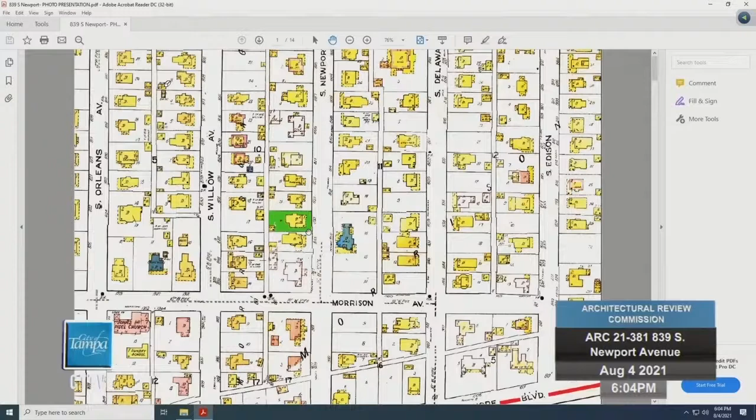Highlighted in the green shaded area is the property in question at 839 Newport. Newport is the front-facing street. There is an alley to the rear that runs north and south. As you continue to the west, you have Willow as a point of reference, and then Morrison to the south. You see the grand wraparound porch that was period appropriate to this house when it was constructed. The wraparound porch is a character-defining feature that's still there in its original state.

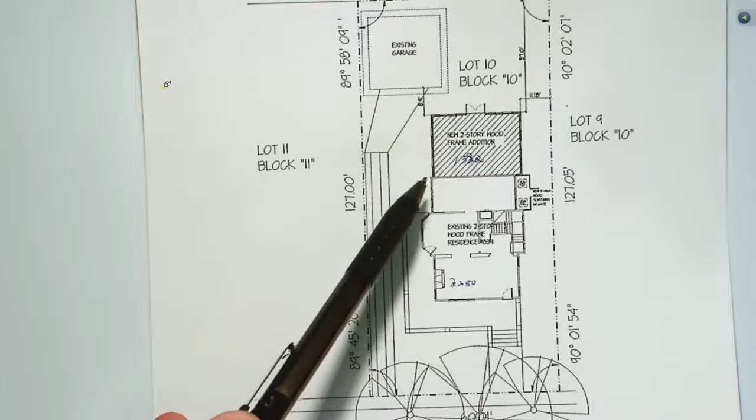And then on the south side, we have set back the home the 6 inches that are required by the ARC and the local code to make a clear demarcation from the existing home to the new structure. Also important to note that the roof lines and the soffits from the new house to the addition are consistent, and you will not see a break in any of the soffits or roof lines on the north or south ends. And then on the back, as requested, we've added these double doors with a porch and steps down to the rear yard.

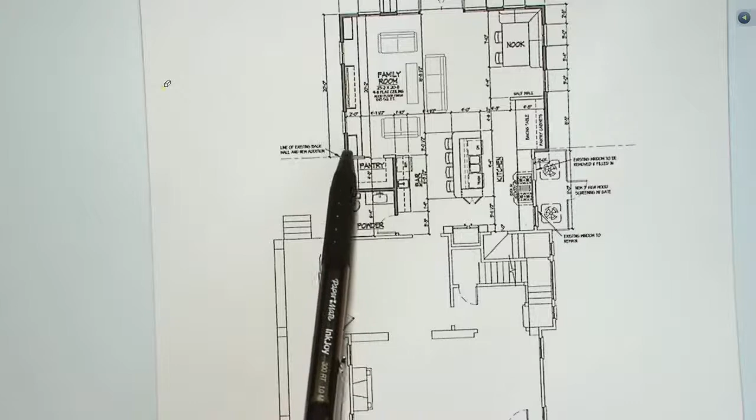This is a floor plan of the ground floor. You can see the notch here, the 6 inches that I noted in the previous site plan, and again the elevation and sight line of the existing home structure to the addition are concurrent here. What we're trying to do is, this home has a proper formal living room when you walk in, a nice dining room, but as it exists, there wasn't a large family room and kitchen to accommodate a family of 2, possibly 3 one day. We've added a generous family room with a nice eat-in kitchen and kitchen island that I think will really make this a spectacular home for our family.

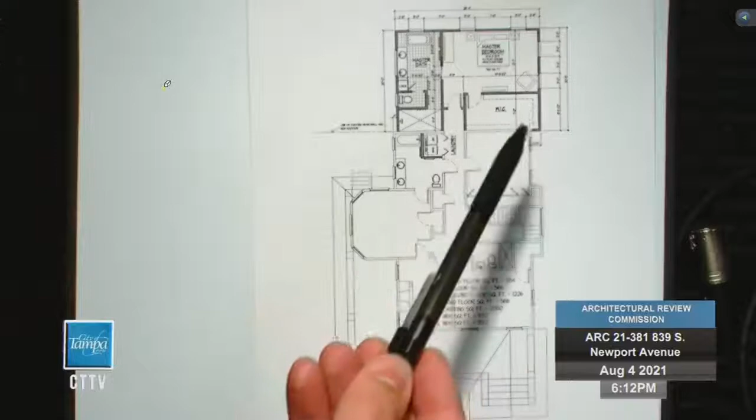This is a floor plan of the second floor. Again, existing home at the setback notch, 6 inches on the south side here. Keeping in the sight line of the north side, the same, concurrent, the elevation goes straight up from the ground floor to the second floor. What we've done here is we've expanded the second floor to include a master bathroom, a master bedroom, and a walk-in closet, in addition to a much-needed laundry room for the house.

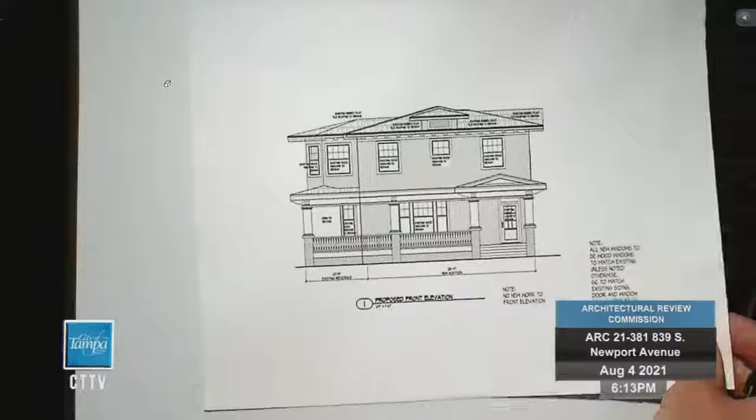This first elevation picture is the east elevation. This is the front of the house. There are no changes to the front of the house from the street level. What you see now is remaining. The only change, as I noted in the beginning of the presentation, is that we are stripping the brick of the paint from the previous owner to restore all of the brick to the original state it was in 100 years ago.

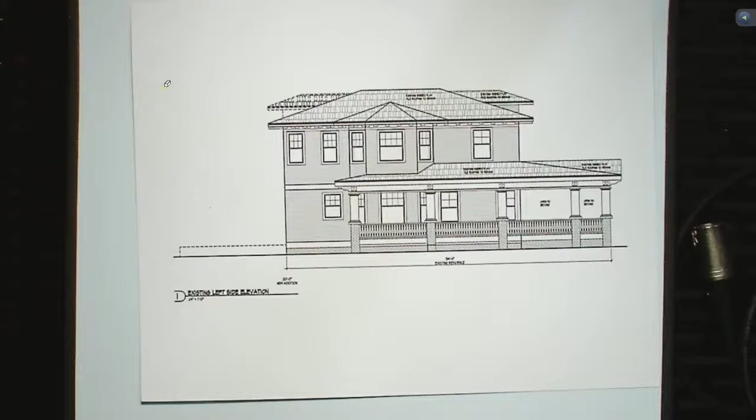This is the south elevation. Again, this is the existing home with no additions shown here. Let me get the second elevation.

This is the proposed addition from the south. What you see here, the existing home ends, this is the 6-inch notch that I showed you in the site plan, and then the same roof and soffit line coming across, no change there. In the initial elevation that you saw, this soffit at the rear of the home will need to be removed, and we're going to replace it back with the addition. So the roof structure itself, while it's expanding, the architecture of it will remain the same as it exists now.

And then we've added 4 windows on the south elevation. These 2 are in the family room, and these 2 windows on the second floor are for the bathroom, the master bath.

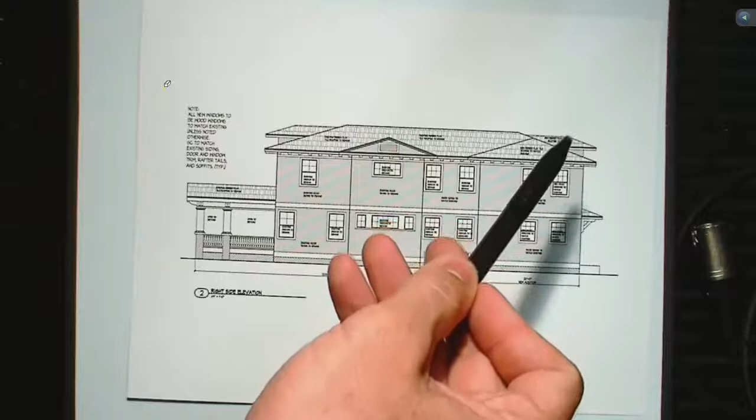This is an existing elevation of the house from the north. This is the proposed addition from the north. The demarcation from the old house to the new addition is where my pen is here. These two windows on the second floor are in the master bedroom, the two windows at the bottom are in the eat-in kitchen area. Again, same comments on the roof line, soffit line coming across remaining the same, and the addition of the soffit roof piece at the west elevation will remain the same.

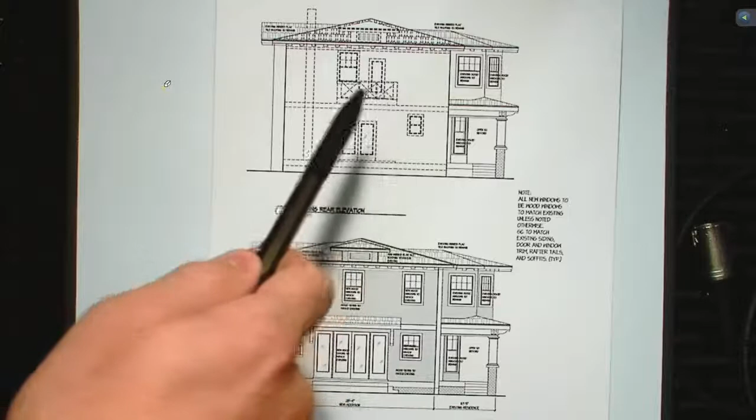The picture at the top of the page here is the existing home. There's a little Juliet balcony that will be removed and replaced with these three windows that you see here. We're adding 4 French doors, 2 operable at the ground floor level with windows flanking either side, a little roof eave over the 4 windows in the rear, and then a porch step coming off of the rear of the home to access the rear yard.

The final 2 photos I have for you are the bird's eye view of the roof lines. This is the home as it exists today, and this shows the addition of the roof lines, maintaining the sight lines and the soffits on the north and south elevations, and replacing the architectural roof detail on the west side when we replace the roof.

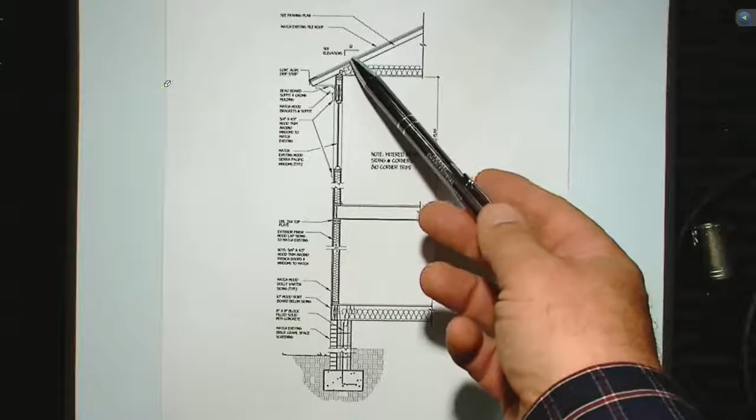I'm basically here just to go over some of the elements that are important on the wall sections. The wall section on the exterior is very important to this house for a couple reasons. The tile on this roof is a little bit different than we've seen before, I have a picture of it for you here. As I go through the wall section, what I wanted to point out to you was the roof is going to be matching exactly as you see it. I'm going to have a sample of the roof. We found a manufacturer that actually has this roof, which is pretty fortunate.

We have an extensive bracket system underneath this house on the soffits, over 2.5 feet, which I'll show you a picture of in a minute. It's very extensive, with beadboard.

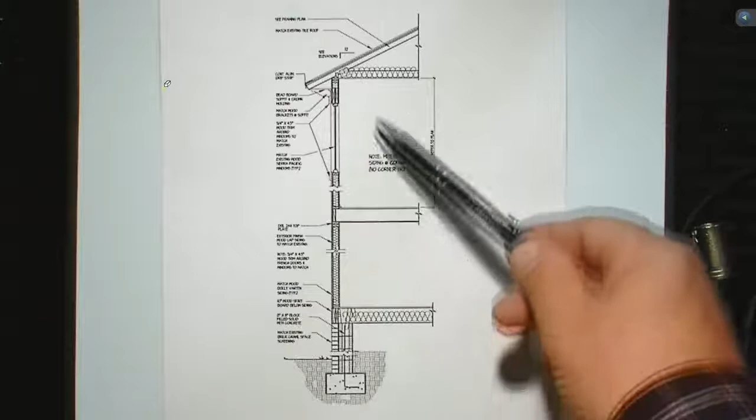The window moldings will have the same 5/4 by 4.5 inch wood casing around all of them, and the top of the window will have its bed molding or small crown. The siding will be Dolly Varden siding, mitered on the corners, with no trim on the corners of the house. We'll have a 10-inch board below the siding before the crawl space, and then brick on the crawl space that we're going to reproduce.

I'd like to show you a few pictures of this. I have a sample of the roof, but in actuality, that's what we're going to be duplicating. It's a flat tile roof with 2 concave areas that interlock, quite unusual. This is exactly what we can have reproduced and put on the new section of the house, as well as the new dormer on the roof line that we're taking off and putting back on for the attic, as well as the caps on all the ridges.

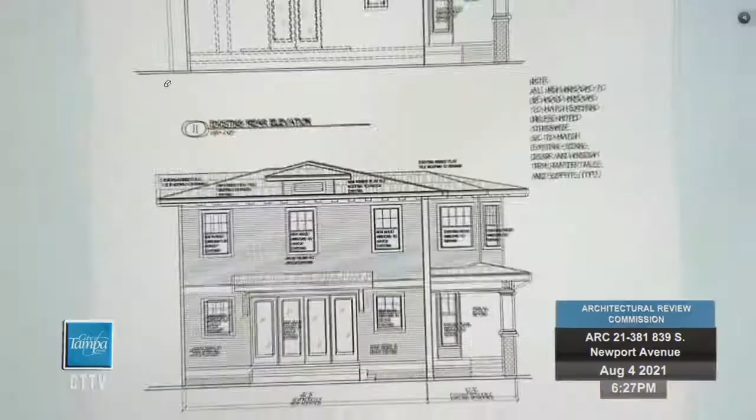Here's a picture, let's go back to that a minute. It'll have a bracket system similar to, I don't have a side cross section of that, but it'll be your typical side angled bracket system that you'd see in Hyde Park, with barrel tile roof and beadboard understructure. Is that actually barrel tile or flat tile, like the rest of the house? It is flat tile. Okay, and then the brackets are open, not closed? Correct, like the one on the side elevation. That's correct. And since you're saying beadboard, I assume that means it's a flat plane, correct?

It'll be tongue and groove. Okay, and then in terms of the steps coming out, what material? We are going to be using wood, 5/4 pressure treated material. Okay.

So, while we have you up here, I know you discussed in detail the nature of the window and door details in terms of their framing and how they sit in the wall, but I don't recall you presenting a specification or a cut sheet or a methodology on the new windows and doors you're putting in. Have you decided how you're going to go about those? Are you going to have them custom fabricated, or pre-manufactured? The windows are going to be wood windows made by Sierra Pacific.

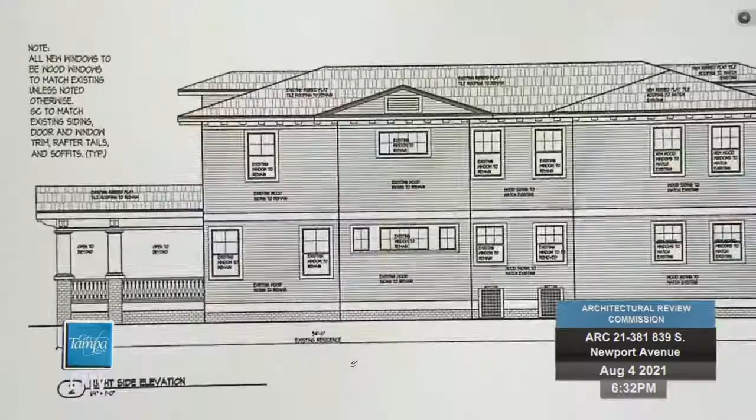My question refers more to the new windows on the back portion, or right side, of the new addition. It looks like you're drawing the overall dimensions from the windows in that setback, not the windows on the front portion. On the second floor, it looks like all the windows are on the same dimension in terms of height. That's correct. Is there a rationale, because I believe it's the same on the south side, for why you went with a smaller window instead of a taller one?

Is there a programmatic piece restricting it, or is it more aesthetic? It was just the aesthetic, I believe, when my architect was looking at it. Johnny, would you be able to answer that question a little bit? Could you get to the microphone? Sorry.

There might be a built-in bench or some sort of seating in there. I think you're referring to the bathroom windows on the opposite side of the house. No, on this one, if I'm correct, this is where the dining area is on the right side, under the new addition on the first floor. So I'm just wondering the rationale behind that.

Those two windows match the two windows to the left of it, whereas the front windows are taller. So I was just curious, was there a reason you decided to match those? Yeah, we were trying to maintain the aesthetic of the service areas of the house. Those two windows above the air conditioning units are the kitchen area, so we were maintaining that line because it goes into the breakfast nook area.

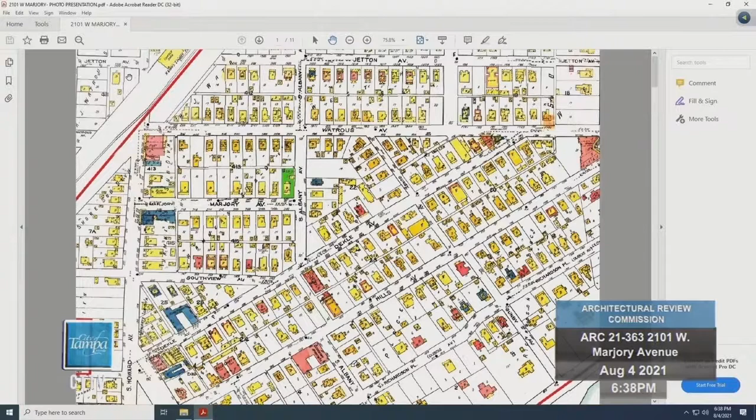Thank you, Ron. Good evening, Commissioners. Ron Vila, staff with Historic Preservation. Moving to the next agenda item, ARC 21-363, for the address of 2101 West Marjory Avenue. This is also in the Hyde Park Historic District. The primary structure dates back to 1923.

In 1988, when staff was doing a survey of the area, this house was modified greatly. Since then, through my tenure with the city, little by little, this house has been brought back. It's a one-story craftsman-style home that had many modifications, and little by little, with the help of this board, is coming back to its original luster. So it is a non-contributing structure currently. The zoning classification is RS60, and the request this evening is for new construction, an addition to the primary structure with some site improvements.

On the monitor, I usually like to start with the 1929 Sanborn map. This is a corner parcel, indicated in the shaded green area, on the corner of Albany, which runs north and south, and Marjory, which runs east and west. Marjory dies into Howard Avenue as a point of reference. There is an alley to the rear. The accessory structure is not there, and if you look at the footprint of the structure, as we go through the photos, you'll see that the footprint established in 1929 is not the footprint today, so it's been modified.

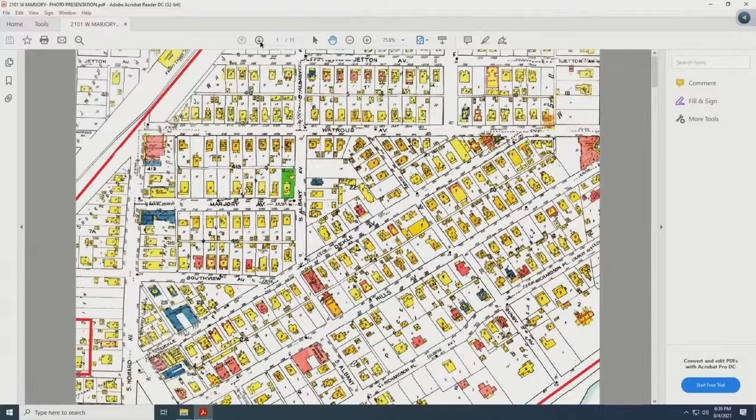Looking from above, you see this little notch, which is what I was referring to, where the footprint has been changed. Once again, you have Albany and Marjory, a corner parcel. This is a portion of the porch that still remains open. This was the original house, and this bump-out was added on sometime before 2000. Continuing with the photos, here's a different angle of the front facade facing Marjory. This is the property to the west, down Marjory, sharing a common property line. This is looking down Albany, showing that addition done some time ago, and the perimeter fencing.

Trying to get a shot of the area in question where the addition is going to take place. It is a corner element and rear. This is looking at the rear, so once again you have the primary house delineated by the gables, this portion that was added on, and then this hip that was added on some time ago as well.

Just looking at the rear elevation again. This is the parking structure, just off the alley, but they come in off of Albany. This is Albany here, and this is the entrance to that parking element. That concludes the photo presentation, and at this time the agent can address the board. Thank you.

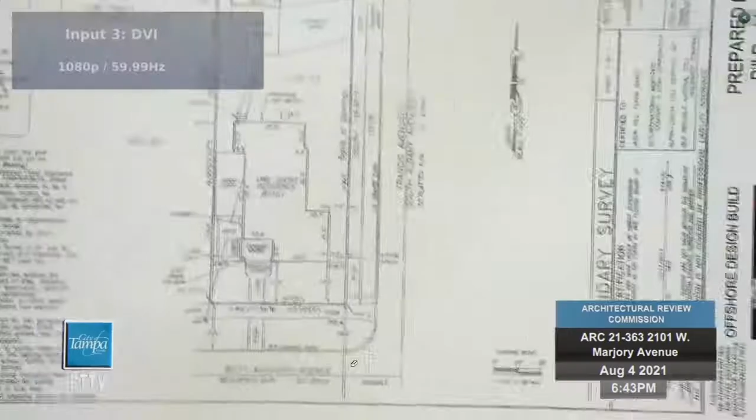So here we are. Here's Marjory. It is a corner lot, and the bump out that was added on was this piece here, probably in the early 2000s. It is a long lot. It's 139 feet long by 57 feet wide, and our proposed project is here in the rear.

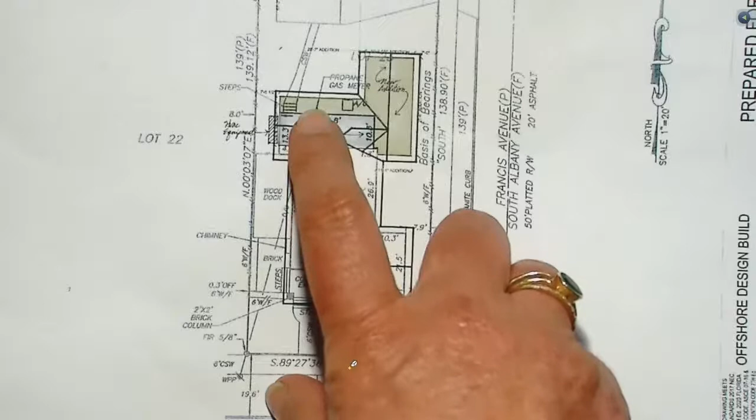Trying to delineate with color what is being remodeled on the inside. That is that portion that I was saying is 7 feet in ceiling height, very small. The idea is to expand the kitchen, add a small mudroom, and do a master bedroom suite on the first floor. The existing house currently has 2 bedrooms, so this would be a 3-2 with the addition.

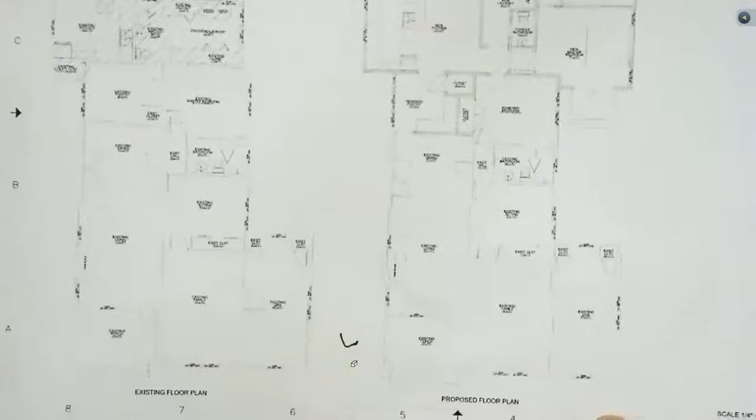So here's the existing portion of the home that's going to be remodeled. As you can see, there's a small kitchen, then there's a small bathroom, and then a laundry area that connects to the existing master. That's one of the original bedrooms, and they want to keep that.

And then the addition remodels a portion of the space and extends it by about 7 feet for a proper eat-in kitchen with laundry, a powder bath, and then over here, a master bedroom suite that has French doors that open into a side yard, the bedroom, the closet, and then a master bathroom.

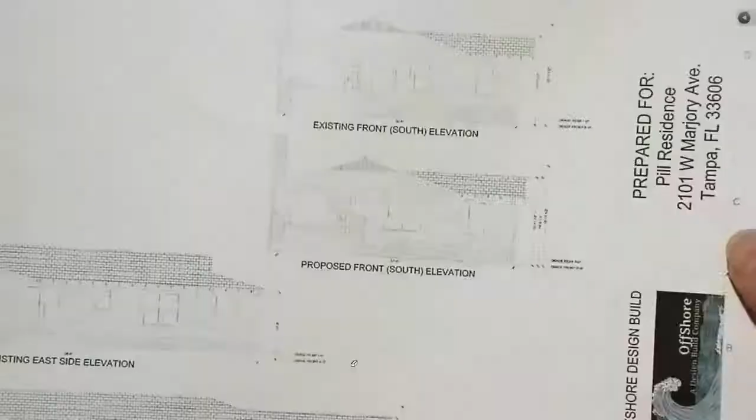Beginning with the front elevation, just to remind you that the bump in the back is about - I'm sorry, but these are really light, so it's hard to see. I have the original drawings here, Ron has them, if we need to break them out. From the front of the house, there's really no material change. The bump out is about 65 feet from the front elevation of the house.

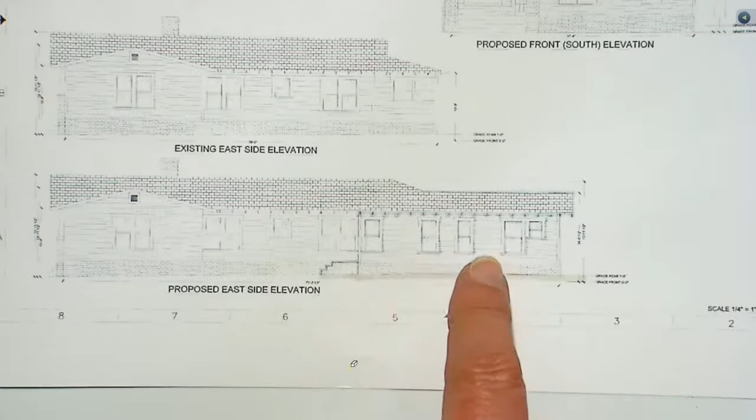On the side, this is the side that includes the master bedroom bump out, so there's no work being done on this portion of the house. And then we have 2 windows in the master bedroom, 1 window in the closet, and then 2 windows in the master bathroom.

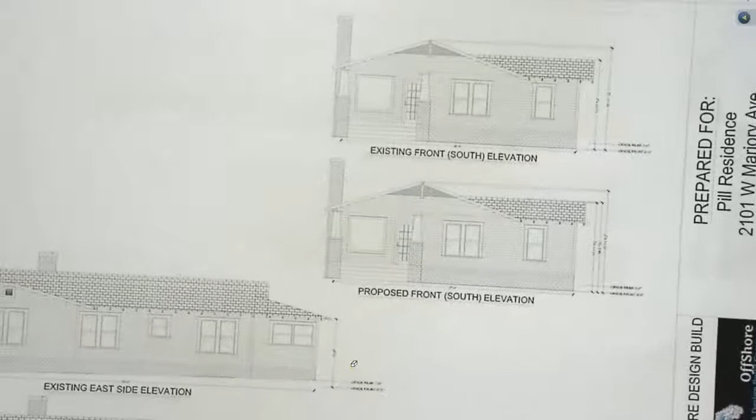These might be better. Let me repeat that - these are better. So there's the existing front.

And then this is the elevation that faces the cross street. That's the existing condition showing that enclosed porch area that has a very low ceiling. And then this is the longest portion of the addition here that shows the steps, which are going to be Trex, the windows in the master bedroom, closet, and master bathroom.

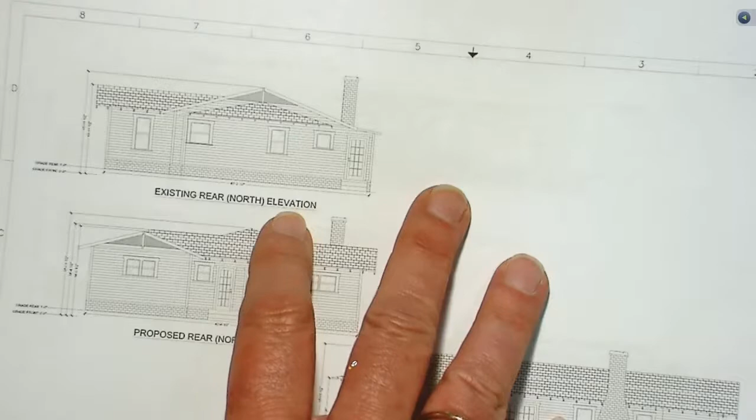This is the elevation on the back of the house currently - kind of a mishmash of windows. Don't really know when that was enclosed. And then this is the proposed rear elevation, which shows the end gable, which would have the same vent and bracket as on the front of the house, a door to the mudroom, French doors into the kitchen, and then a pair of windows over a counter.

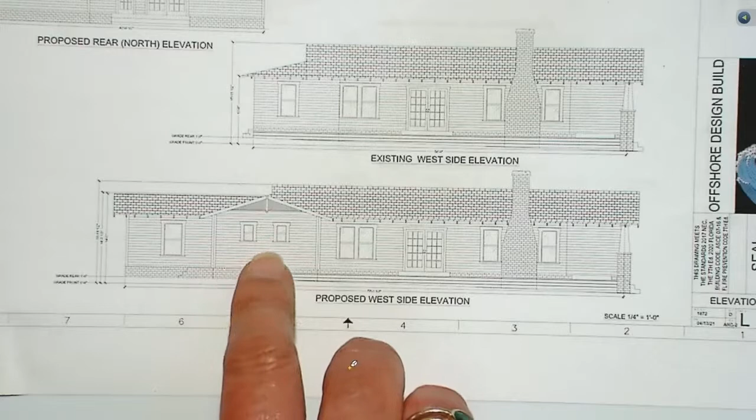This is the existing west elevation. These were not original. And like I said, this is that portion that has the very low ceiling, which is currently where the kitchen is. And what we would like to do, of course, is have a more functional kitchen, and then that's the end of the master bedroom in the distance.

In terms of the materials proposed, this is a product that we've used many times in Hyde Park. It's the Jeld-Wen AuraLast wood windows, single or double hung, and also for the rear doors. There's a pair of French doors on the rear, a pair off the master, and one pedestrian door into the mudroom. So we would propose the Jeld-Wen AuraLast for both the doors and the windows.

For the roof, we would propose to use the Owens Corning Duration Shingle Series, and that's actually what's on the house right now. We're going to try to match as closely as possible the color, even though the roofing has faded over time. We may end up re-roofing the whole thing.

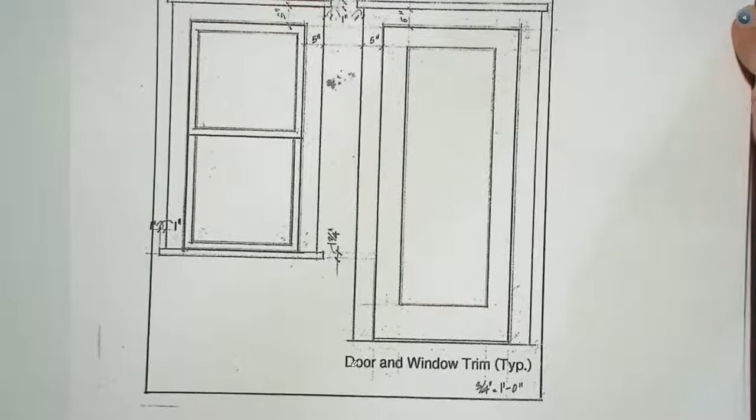We have not made a lighting selection because at this time there is no exterior lighting on the house, but we were thinking of using something a little more craftsman-y for the exterior hardware.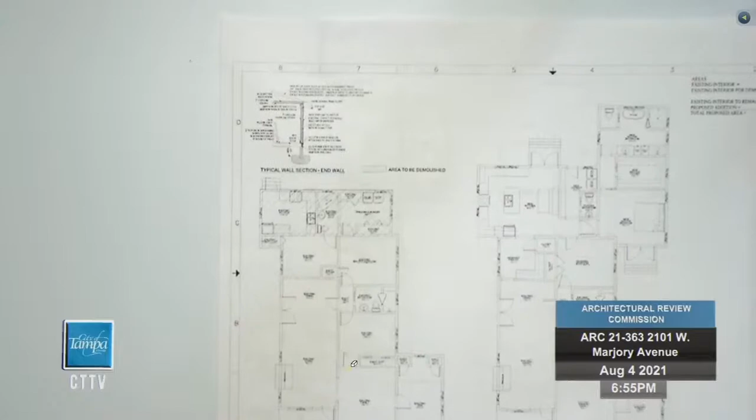While I'm here, it's a continuous foundation that's wrapped in brick. There are no piers, and the ventilation is done by piercing of the brick. So it's a continuous foundation that has a brick facing on it.

The wall is a 2x6 to give you that depth that you need for the windows in particular. The siding is just a regular 5-inch wood cedar siding. The overhang is 2 feet, and that's consistent all the way around the house.

All elevations are 2 feet deep. It's a tongue and groove soffit, and the rafter tails are 2x8. The roof, as I discussed, is going to be placed over the existing roof with that Owens Corning shingle.

Would a commissioner like to ask any additional questions? Yes, please. Ms. Rucraft, if you would please pull up your east and your north elevations. I have some questions for a couple of windows.

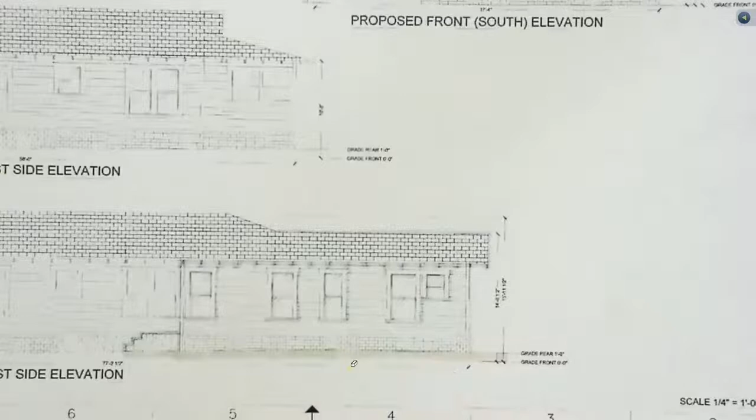Let's start with this one, please. We go to your addition, and we go all the way to the north portion of this addition, and I see 2 windows, one large and one very, very small, in sufficient proximity to each other to be effectively ganged. I find that combination a little bit disconcerting because of one size versus the other.

I do note that there are gang windows on the existing building, but they're of the same size. I understand also the programmatic nature as to why we have a larger and a smaller window in this location. Is there a possibility where you might be able to produce a greater separation between these 2 windows so that there would be enough space between them so as they would not so appear to be ganged and ungainly because of their different sizes?

Yes, we could do that. The larger window could be shifted to the south to give more separation. Alternatively, we could have 2 small windows that were adjoined. We could do either one.

Either one, okay. So perhaps this might be an element for coordination with staff. But something's going to have to happen to these 2 windows, either by separation or by sizing that can be ganged together and make sense out of it. Because that's what becomes a sore thumb element. Even though it's on the back, it is still on a street fronting area, and it will be seen and perhaps even noticed, and it looks like an error.

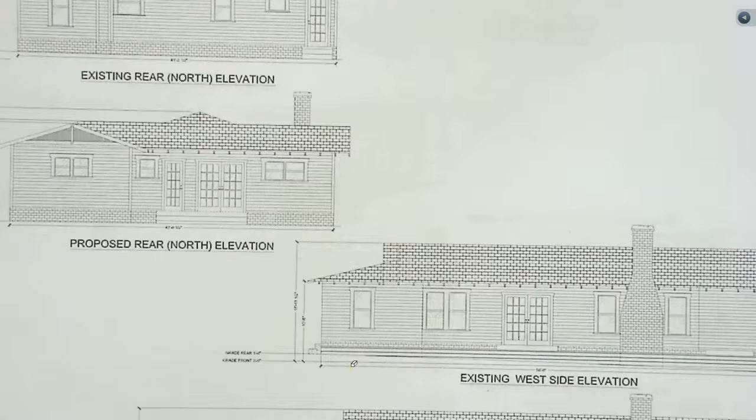I understand the height for the tub, and I understand the height for the kitchen counter. And I understand your desire to keep things as consistent as you possibly can as a sightline item. So that doesn't really bother me right here. I'd rather see them all of a consistent nature in this small elevation, keeping it in terms of the jewel box that it is, as opposed to having a wild variation between all the individual windows.

Okay, that's fine. We can certainly do a triple in the kitchen. Thank you very much, that's all I have for the moment.

Commissioner Clausmith? Come back to me, please. Commissioner Taylor?

I think the reason why they went with the French doors that have a divided light is that the existing French door has a divided light, but I don't think they would fall on their sword on that at all. I think what they want is full glass, as much light as possible.

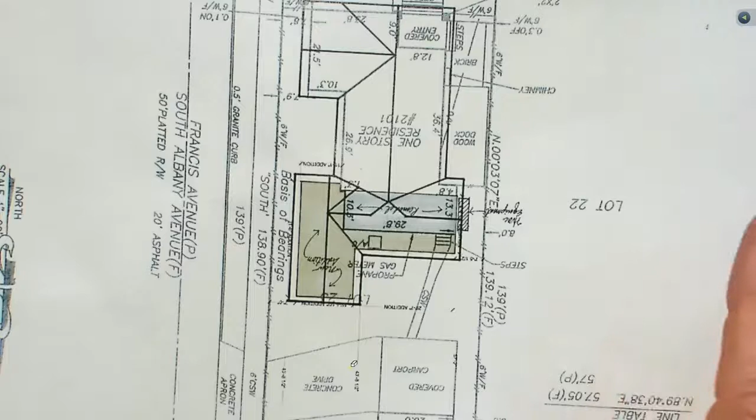Could you indicate where the mechanical units are? I don't think you pointed those out before. I didn't, I'm sorry, they're right here on the inside. So they'll be inboard of the existing fence line? Yes, correct. Are there any other pieces of equipment that will be set out, like a water heater or anything like that?

They are going to have a gas water heater, but we would propose to put it in on that same area we call the service area. Everything on the service side would get ganged together.

Now someday, like I said, there will be a pool, and so we're going to have to figure out where to put the pool. We won't worry about that now.

Just preparing you, I'm sorry? Just preparing you, that's coming. That's fine, I may not be here, who knows?

There was a question from the staff report about a partial elevation showing the gable end at the secondary entrance. Do we know what that is related to? Do you know what that is related to?

Yes, I know what that is related to. Could we look at that really quick? Because I don't remember. We would love to show it to you, but you don't have it. Okay, I'm sorry, that is completely my mistake. What he was asking for is right here. Oh, looking back that way? Looking back at that. Okay.

And I'm happy to include it in the final ARC packet to staff for their final approval. I would think that would be important, especially if the fence ever went away, because that's definitely an elevation that would be prominent along that edge of Francis.

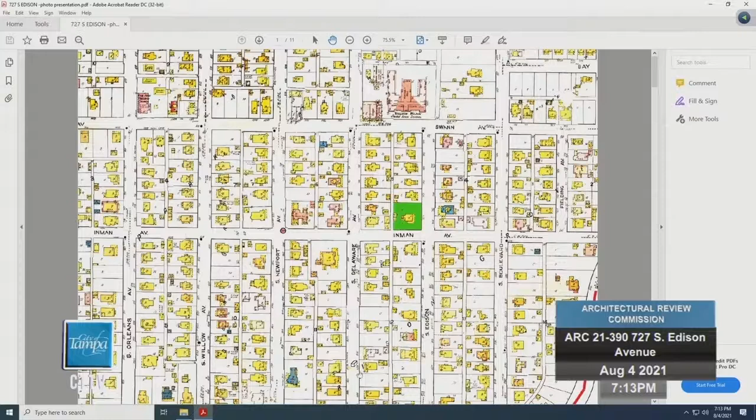To orientate you, you have Swann to the north, one of the primary corridors in Hyde Park. You have Edison that runs north and south, and Inman to the south and Delaware to the west. This is the vicinity map showing a general location within the historic district of Hyde Park. The red is the local district, and this is just in the heart of Hyde Park.

This is looking from above. See the primary structure here, the detached accessory structure, and then to respect the presence of the siting of this house on this parcel, the addition is going to go towards the north.

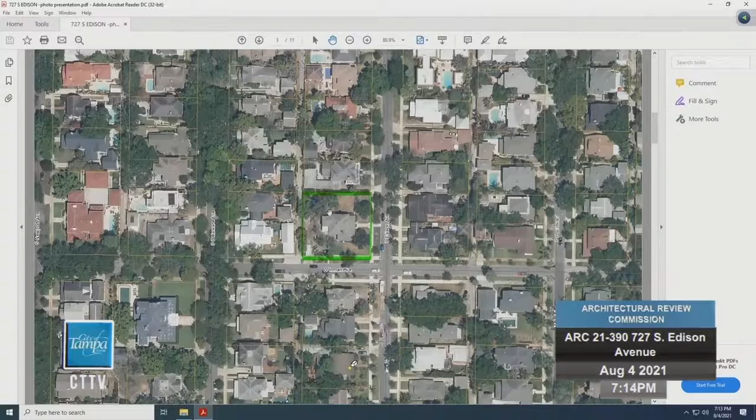This is looking at the front elevation, very generous porch in depth and width. This is looking at the north elevation. There is a little patio area in the back that will be removed as part of this addition, so I wanted to provide you with some guidance. This is where the addition is going to go, back here on this north elevation.

This is looking at the abutting property line, and this is the abutting house to the north.

Moving to the corner element, this is the wraparound porch. We left the railing when we enclosed the room with casements, as our guidelines stipulate, but we left the balustrade so you can see the length of where the wraparound porch went to, and then it died into this last column.

This was an addition, this was an addition, and then the accessory structure approved by a prior board. This is looking at the detached accessory structure that has a connector. This is looking back at the primary structure with that breezeway.

This is a portion looking from Edison that I spoke about. This is that little patio area that's going to be removed, and the two-story volume will take place here.

And the last picture is just showing the arcade that was part of the prior addition that kind of wraps around the rear, and then they have a pool in the back to entertain their friends and family. That concludes the photo presentation, and Ms. Shoecraft will address the board.

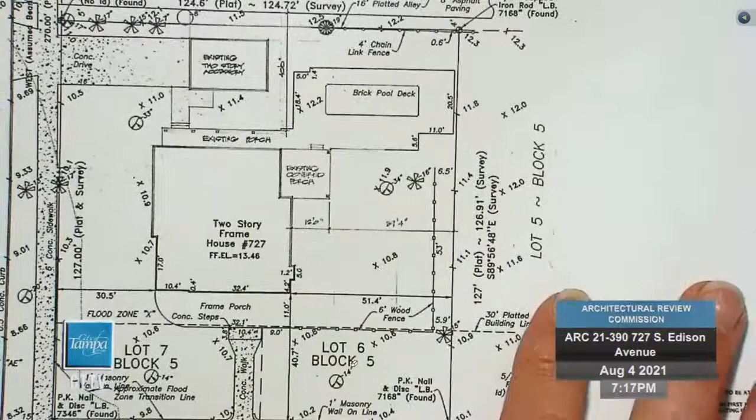This is the accessory structure that my company built, as well as the mudroom, which I'll show you in more detail, and continuing that enclosed porch. But that was 3 years ago.

On the site plan, this is the location of the first floor addition. This portion here is to enclose the existing covered area that was built about 10 years ago. So this house has had a number of additions on the back of the property.

So to reiterate, this was actually the original footprint of the house. This kitchen, this side porch, and this covered porch were added about 10 years ago, 3 owners ago. We came in and added this mudroom and enclosed this space. This was a deck, and we enclosed it and made the sun porch bigger, with custom windows made to match what was already there. This was obviously closed in at some time, we don't know when, because it was a full-on wraparound porch.

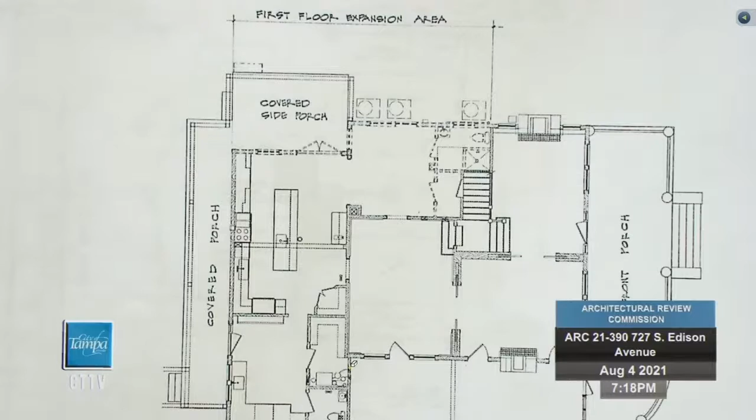So our proposed work is going to take place by enclosing this covered porch, which was added about 10 years ago. We believe this was probably the original kitchen at one time, but currently it just functions as an extra room. All the AC units are here, and we would propose to move them over here behind a fence. As Ron stated, there's no work in any of this area of the house. We're concentrating all the work in the northwest corner.

This is the proposed plan, which would pretty much keep the kitchen in the same footprint, with some minor changes, but one of the more significant ones is putting in 2 windows. This whole wall from here to here has no windows, so we wanted to add windows.

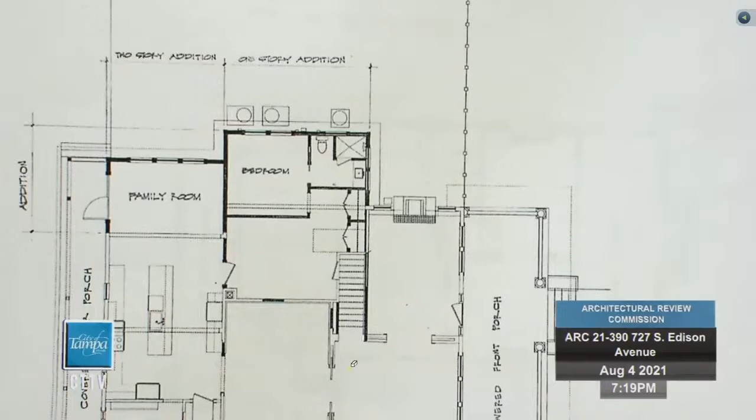Sorry, could you zoom out just a little bit? Yep, sorry, thank you, you know my talent. A little more? Is that good? That's good, thank you, okay, sorry.

So we're proposing to put in 2 windows here. As I said, this is the portion of the house that was added on about 10 years ago. This is the new family room, breakfast area, which is going to take the place of that covered porch, also added on 10 years ago. And then the true addition to the property is this section right here, where we're going to do an ensuite bedroom, bathroom, closet, and a small sitting area for the mother-in-law who's moving in with them.

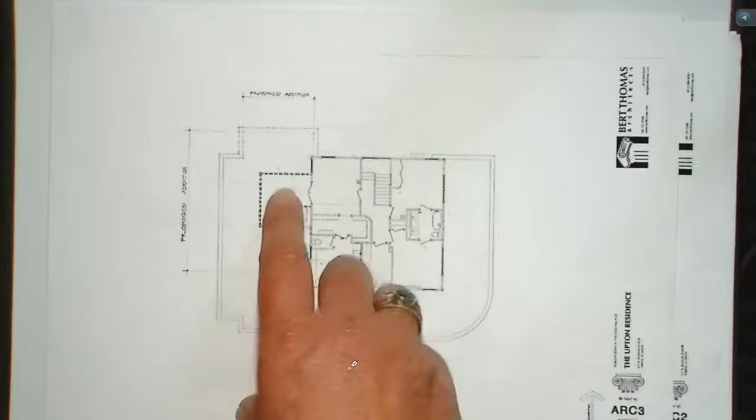On the second story, for a house that has this really large footprint on the first floor, you can see it's actually quite small relative to the scale of the house. At the moment there's 2 bedrooms and a Jack and Jill, a laundry, a bathroom, a closet, and this currently functions as a bedroom because it's the old sleeping porch, which is in fairly dilapidated condition, and I'm not quite sure what the previous owners used it for because it's not heated and air conditioned.

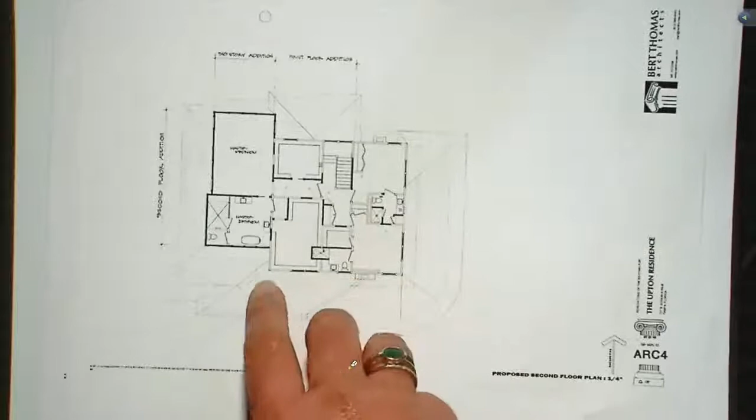So what we propose to do is make some changes to the interior floor plan so that you would have an ensuite bathroom here, a second ensuite with a closet, so you still would have the 2 bedrooms, plus an office, a closet, a master bath, and then a master bedroom. Again, trying to shift the focus of the massing into the northwest corner, keeping this corner in particular well clear. That's about 6 or 7 feet from the corner.

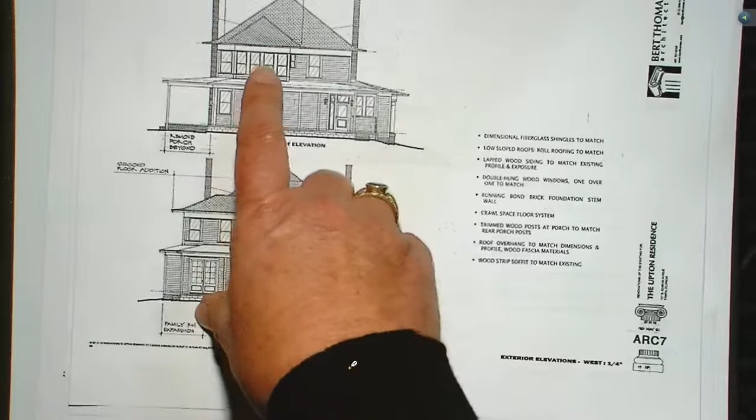What we would propose to do on the second floor is create the effect of a sleeping porch, then have the master tucked behind it, since the sleeping porch protrudes in front. From Inman there's not a clear view of that, but you can certainly see it from the alley, and you'd see a portion of it from Edison.

On the rear, we're adding 2 windows in the kitchen as well as a pair of French doors to get as much natural light into that portion of the space. That's where the old covered porch was.

Moving to the north, the location of the equipment, which is here now, is actually going to go here, though we did not make that change on the drawing. There's a note that says relocated equipment is going to go in here, tucked away behind this first floor addition, so it will only be visible from the neighbor and possibly from the alley, but they have a fence.

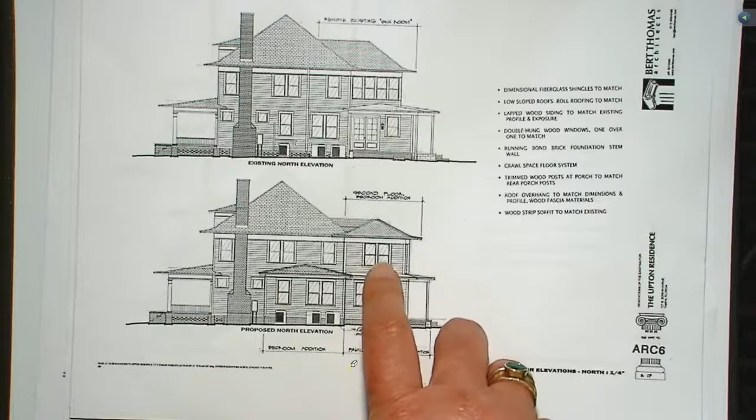These are the 3 windows in the family room, and these are the 2 windows in the master. Again, this is the new roof line.

One of the things we tried to hold onto was that slope at the end of the roof, as much as possible, pretty much all the way around on all the new roof lines, to be consistent with what's there.

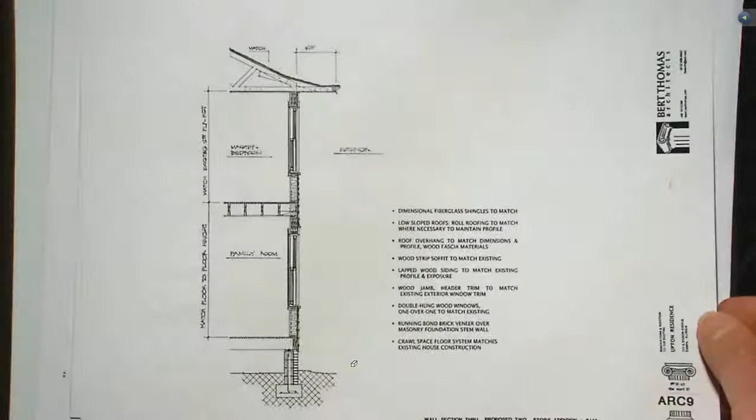We have a better section here. This is also a foundation, basically a block foundation that's continuous with masonry veneer, but we do it right—we turn the corners if we need to.

This is the portion where we remove certain bricks in a decorative pattern with screening behind it in order to get ventilation under the house. The walls are 2 by 6.

There's the description of the roughly 3-foot sloping roof that changes pitch from the rest of it, which we're going to match with the current fiberglass shingles, with what's there now, obviously with what we would put on.

The roof overhang is going to match the dimensions, the profile, and the fascia materials of what's there now. The overhang is 3 feet overall.

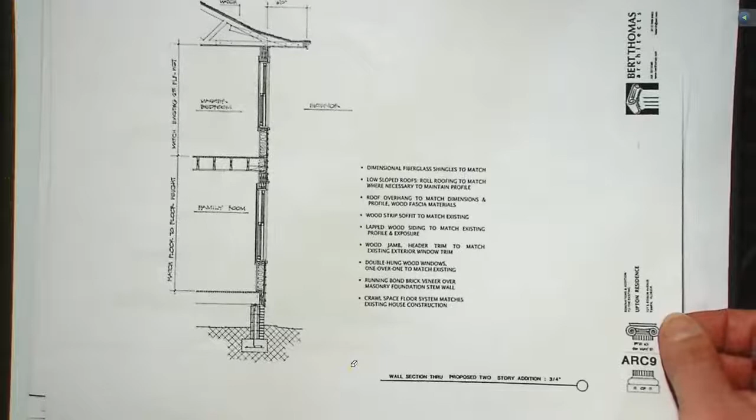There's a wood strip soffit to match the existing, and that's actually a beadboard soffit, as opposed to the earlier project, which was tongue and groove.

All the header trim will match the existing condition, and I have quite a few pictures of that. We have double hung wood windows—these are the AuraLast Jeld-Wen, which we've used very successfully in almost all our projects over the last 15 years.

As I mentioned, there's the running bond brick veneer over the footing, and the crawl space floor system matches all the existing house, so there's no change in elevation.

This again is the Jeld-Wen AuraLast product, both for the doors and windows. The windows would be 1 over 1, just like the primary windows on the house. The decorative windows on the house are really the ones in the sun porch.

I've got some photographs of the existing condition to show you what we would intend to match. So here's the beadboard soffit. There's a corner board here and novelty siding. I have a close-up of this detail.

It's a little fancier than your blocky Craftsman trim. It actually has an extra piece on top, which you can see here. Most of them would end here, and then there are these 2 extra pieces of trim which we would match—that material is readily available, and if not, we can have it made.

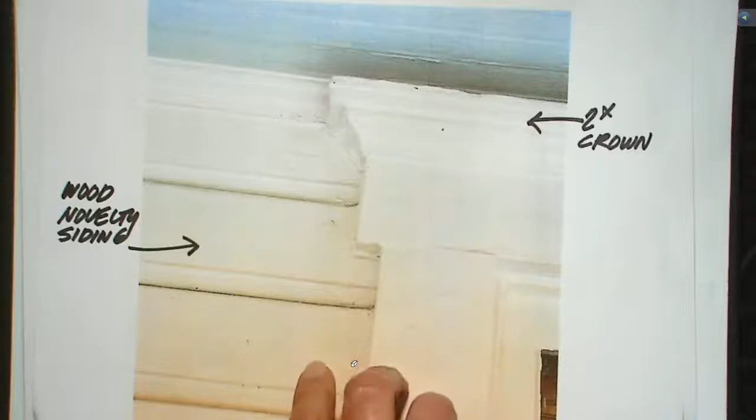The lighting on the outside of the house—at the moment she's got custom Bevolo gas lighting—and the intention is to continue that same lantern on the back of the house, on the outside of the French doors, particularly on the first floor. This is again a better close-up of that fancy header trim on the windows and the novelty siding, which is all original to the house.

I believe that's all I have right now.

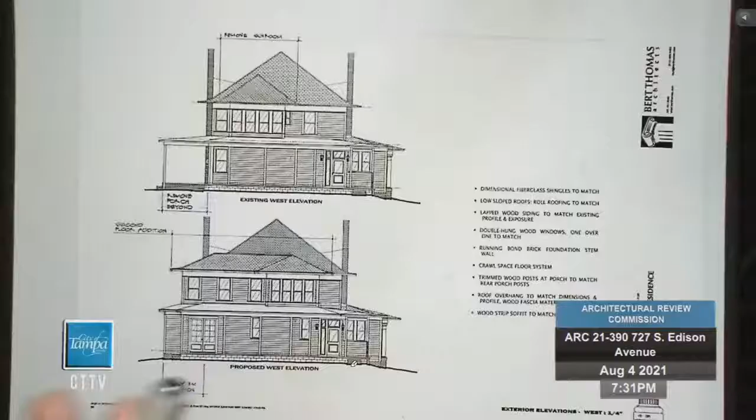Or am I reading it wrong? No, you're not reading it wrong. We did, Commissioner Sutton, take a look at trying to match the original pitch of the main roof structure, but due to the dimensioning of some of the spacing, it didn't quite match exactly.

What I'm referring to specifically right now is the west elevation. If you look at the screened, the sleeping porch area, we could, not artificially, but we could change the pitch of that roof as well as the one over the master, so that it's taller, to be more in keeping with the mother roof, the big one. That can be done. I think that would help tremendously with the balance of what we're looking at.

And if I may, to answer Ron's question about the rolled roof, as you know, it's a code issue, and we would have to use a material that we would paint, essentially, to try to match the color of the roof as best possible. That section that's rolled is about 3 feet. That's what we would have to do from a code perspective, at least that's what I've been told.

Or perhaps an alternative might be available. It all depends what you would use for your underlayment. As an example, in that particular location, or perhaps over the entire section of that roof, if you underlaid with a peel and stick, would that be sufficient for the purposes of protecting that and still allow you to put a shingle over it in order to maintain that consistency that you have on the remainder of the building? Because let's put it this way, if you're going to re-roof the whole of the building, you would be seeing that same issue all around the existing perimeter.

Just to satisfy my own thoughts in my head, can you keep this one up and put the south elevation next to them? Side by side? Yes. Okay. Hopefully they're at the same scale, yes. So can I see the second floor plans? I think you had existing and proposed together, right? First or second floor? The second floor.

Can you rotate them 90 degrees so that it's actually facing correctly? Let's see if I can. Can you line up the existing walls? I'm sorry, there.

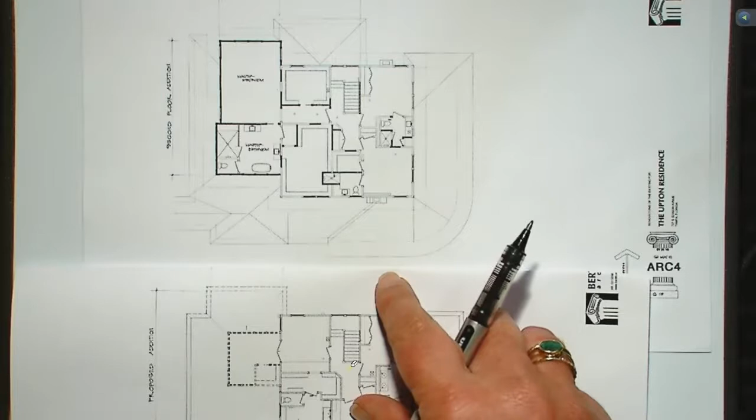What is that dimensional shift from the original sleeping porch to the new proposed bath? What's that difference in length? I'm going to say it's probably 3.5 feet deeper, and then it comes forward, as you can see. Yeah, I can see that too.

So how deep is the master bedroom, the one on the shortest dimension? I believe it's 14 feet.

Were other options looked at to keep that from moving out towards the rear, so that you're more in keeping with the traditional line of that sleeping porch rather than coming out that additional 3 or 4 feet? It was, yes, but it was our opinion that the sleeping porch that's there now is actually diminutive to the scale of the house. We felt that adding 3.5 feet to that dimension was not going to impact the historic significance of the overall house. On a house of this size, the sleeping porches were actually quite large because they had usually large families, and this one in particular is small, it's diminutive.

Yes, I agree, and in addition, what's on the first floor below it was built in the last 10 years. So we're not going over historic material, we're going over something that was added on 10 years ago. We felt that was an appropriate move, in addition to pulling the master bedroom off the deeper screen porch to give you the turn or the corner you probably would have seen in a house of this vintage.

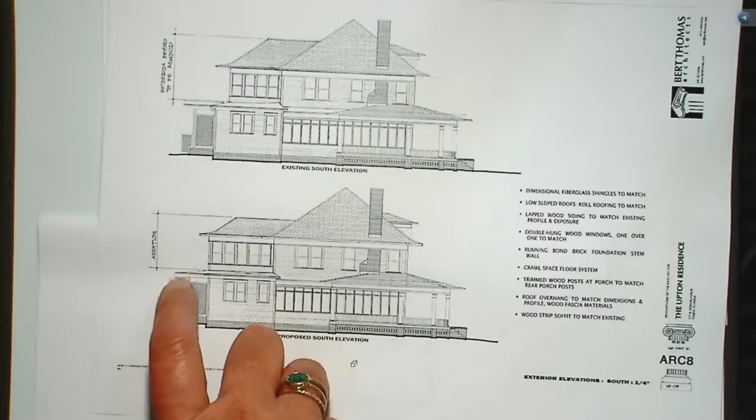It sits on that wall, and then we have this portion here, which is the porch that goes beyond, and the columns are right there. That's a 4-foot spacing between the wall and the columns, and then you have that line that's shown now, the connector covering. But the overhang on that is, I'd say, about a foot, maybe 15 inches.

That's it for me, I'll mull it over in my head. Thank you. Commissioner Taylor?

Can you show us the wall detail again, the wall section? Yes, sir. I just want to see how the siding's tying into the stem wall.

So is there a band board or anything there, or is it siding all the way down to the brick? At the moment, the siding goes all the way down to the brick, there's no band board. And that's matching existing conditions? Exactly. In terms of all the exterior details, we're going to match the existing condition, and by that I mean the historic condition, not all the additions that have been put on over time.

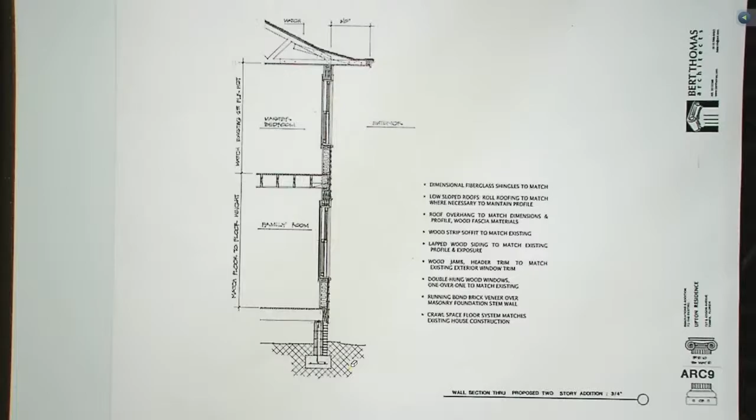Going back to some of the questions she was asking about how that roof ties into the extension - will it still hip around basically like it does now? Yes, we're taking 3 or 4 feet out of that, exactly. It's going to hip around the back and then tie back in. Nothing really changes there, no changes of elevation, but to Commissioner Sutton's point, I think it can be improved overall by a change of the pitch. I agree, yeah, absolutely.

That's all I have. And I'm sorry, that's just a structural building thing that we can do - it's not a problem.

On your west elevation, there are 2 windows that look really close to the vertical trim board. Are those on the first floor? Yes, I believe so - those are hidden behind the columns. Okay, that's why they look funky. Wonderful, thank you. Same comment.

So the only comment I have, and I just want to make sure, maybe clarify this - so the new proposed second floor feature that's going to be the bathroom, that's supposed to emulate the sleeping porch. Did I understand correctly that some of those windows will essentially be spandrel, in the sense that you'll have drywall kind of blocking that view, so it will look like a window but it won't truly be a window?

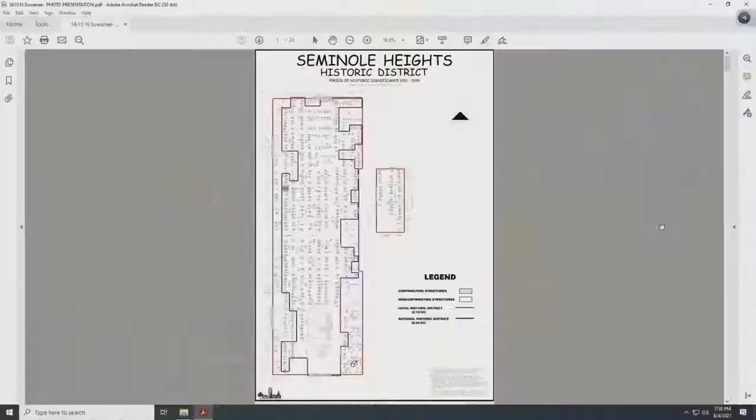Moving quickly through the first part of our photo presentation, you can see that this particular parcel is highlighted in green. It is in the Seminole Heights Historic District, both within the national and local historic district boundaries. This is the Sanborn map from the 1920s, showing the footprint of the structure, with Powhatan Avenue to the north and Suwanee Avenue, where the building faces, to the east.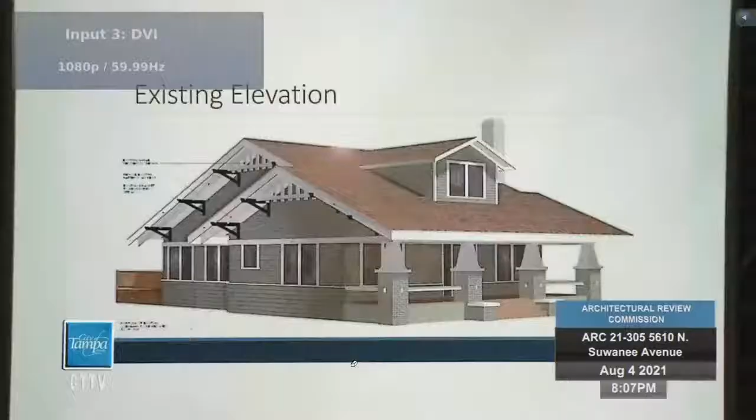So what we're starting with here is we're calling this existing elevation. Obviously, it's not actually what's existing there today, but since we don't have a good photograph of that, this is an elevation with the same scale of overhang as what existed prior.

The site plan comes in 2 pages. We have the lower roof line and the upper roof line. This is the lower roof line. We show that it's approximately reduced by half is what we're requesting. The numbers are approximately 2 feet, and then approximately 4 feet is what existed, and we're asking to change to approximately 27 inches.

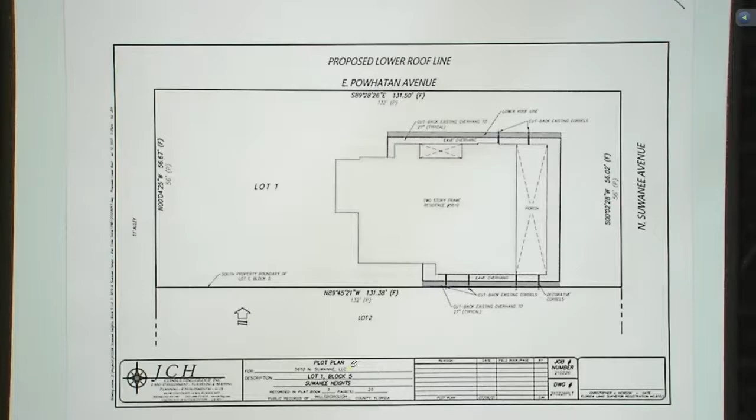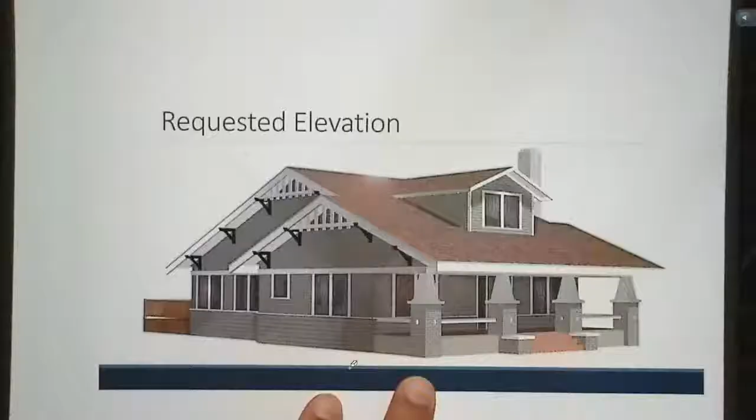And then the same would exist for the upper roof line. Here we have what the requested elevation would look like, and so I hope this image is much different than what is seen in the photos of the condition today, as it's in a stop work condition today, where the work hasn't been completed. But the request today is to build essentially an overhang that looks the same but is reduced in scale.

We have additional elevations, and we can come back to those. But part of the reason that I'm up here presenting, and then we'll have the contractor come up and talk about the challenges, is why we got here. There are 2 main reasons. The slide I'm going to put up is very busy. It's not meant to be comprehensive. I just want to present everything to the commission now, and then we'll break down the different issues.

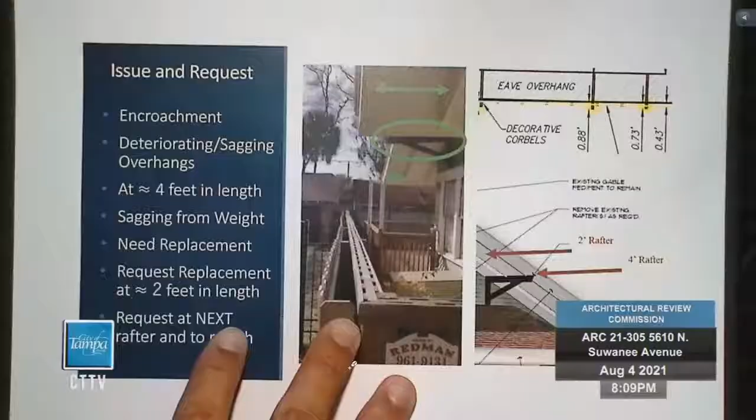The main problem we have is that the structure is so close to the property line, and the overhang is so big that it actually encroaches. We're talking about a property line encroachment, not a setback encroachment. Now, of course, with historic structures that have been around and had the zoning code come up around them, it's not uncommon to have some sort of encroachment into setbacks, but this property has to be changed because it encroaches onto the neighboring property and it can't stay in that condition.

Additionally, the issue is, and we'll have some other pictures of this later when the contractor and roofer discusses, the overhangs are so significant that the weight of them has caused significant sag and deterioration to where the condition of the roof had to be replaced. You can see it a little bit here, where if you look closely, you can see how the angle there has changed. We have a better picture that shows a crease line on top of the roof that we'll show later.

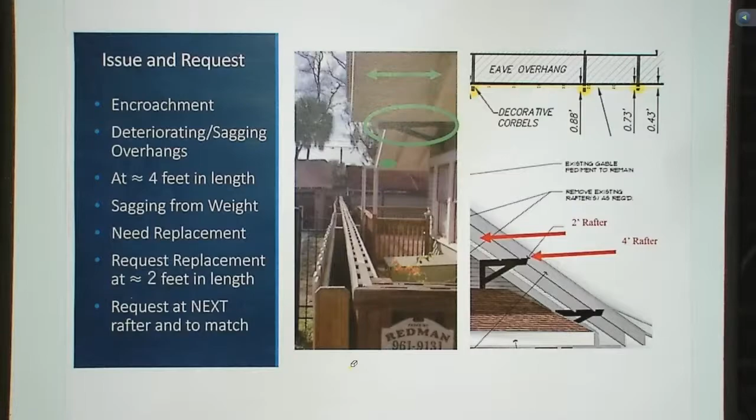The other issue, and we'll come into this later, the rafters underneath the overhang were spaced at about 2 feet, which matches approximately the rafters that go throughout the face of the structure on the east face. So a reduction structurally is going to need some sort of rafter, and what we're proposing is to go into the next rafter so that the rafter spacing remains consistent.

What we think we're going to show this evening is that the reduced design is actually more consistent with what is in the neighborhood. We have a number of photographs to show that. The overhang at 4 feet was much larger than average of what exists in the neighborhood, and we'll talk about that a little bit later.

So what we have here is a trim of a survey that we have completed in the record. Now, the encroachment is not significant in scale compared to the size of the overhang, but the problem is without cooperation of the neighbor, it's going to be very difficult to build right up to the line. This is where staff and the applicant have disagreed.

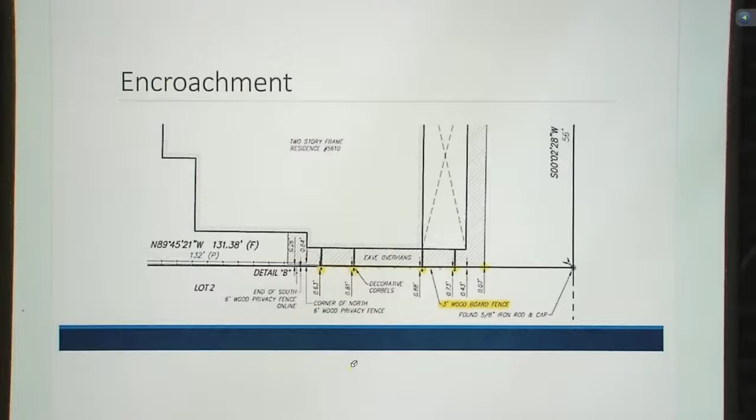Especially with a neighbor that doesn't want you on their property to replace that. So what we're asking for is a little bit of breathing room and the understanding that the most logical place to cut back here is to that other rafter. And then we have factual evidence that we'll put in the record that shows how that's consistent with the historic district.

Here we have a side-by-side elevation of the request. Again, what's noted is the goal is to have a very similar feature, just reduced scale. So we think that while the photographs of the as-is conditions are shocking, the final product that we're proposing here is not shocking and is in character with the historic district.

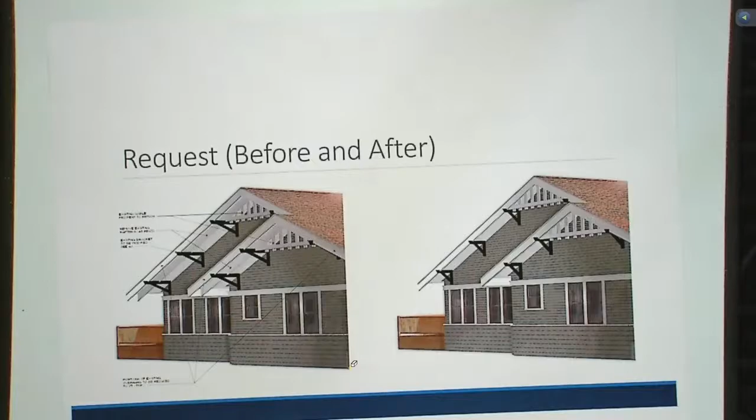So for the next couple of slides, we're going to jump into the code a little bit and present our justification. This part is not quoting the code directly, but what we're suggesting here is an aesthetically similar overhang that'll be more consistent, and that replacing the overhang as is today is impossible, and that to go right up to the property line is impractical. A smaller reduction would be too difficult to complete properly, so we're proposing to go to that second rafter.

And then to make the property consistent, this is a proposal for the north and south elevations, which have the same overhangs. The east and west elevations will remain unchanged.

First, looking to the historic guidelines, the staff report, as I said, pulls a number of details from the Seminole Heights Design Guidelines and the Secretary of the Interior standards. But the staff report doesn't mention that there are situations where this commission can authorize a change, as long as we make a change that's consistent with the historic district.

Where repair is not practical, details should be replaced with comparable details. And what we're proposing to the commission tonight is that repair is not practical the way that it existed before this repair began. And further, just to close the door there, the comparable details that we're proposing today are acceptable.

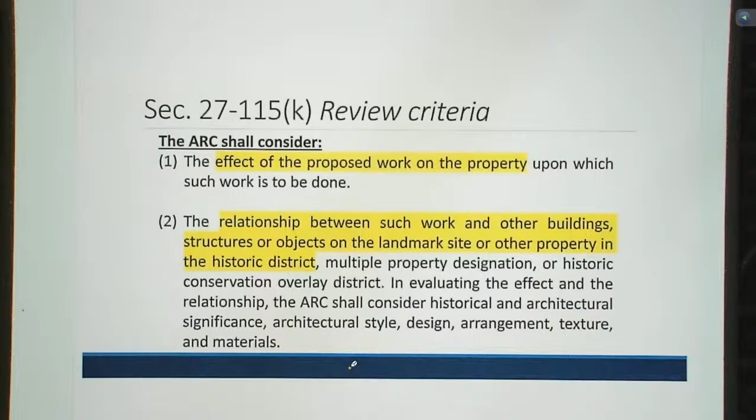And what we're proposing is that when you consider this change in light of the difficulties and the most logical change, and then you compare it to other properties in the district, that it's acceptable and that the Commission can support our request. Notably, the staff report doesn't talk about section 27-115.

So the staff report, again, we agree with all of the items in the staff report regarding what the criteria are, just disagree with staff's finding on the scope being limited to just this property when you're considering a change. And additionally, that a change just inside the property line, basically a minimal change, is practical. We believe that is impractical. The contractor will come up after me and talk about the impracticality of that change, but that's not my area of expertise.

So we're going to shift now to the surrounding properties. These were 6 examples that we thought best expressed what we're trying to do here, properties in the neighborhood that we photographed. As you'll notice, none of these have a second rafter underneath the overhang, and all of these are overhangs at approximately 2 feet. Now, we weren't able to measure these, so we're not holding out the exact measurement.

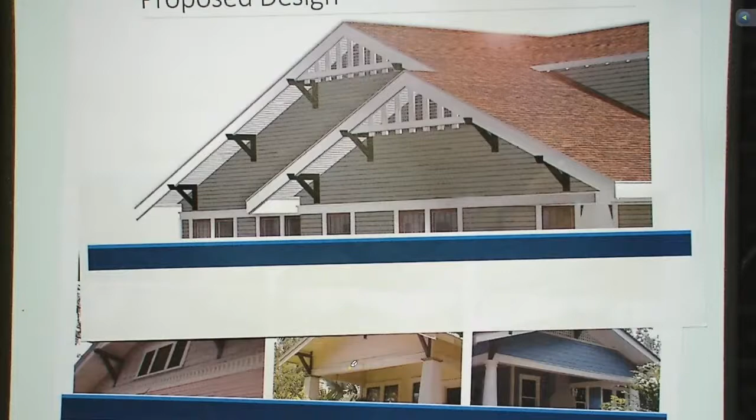But when you compare the scale of what I have shown here, well, I'm not going to quite be able to fit them both, so I'm going to go back and forth. This is an image of what we're proposing, and when compared to what's in the area, you can see what's being proposed is consistent with what's in the area. Again, what existed there with the double rafter under the overhang and with the almost 4-foot overhang was more than average by a lot.

I have some packets here I'd like to submit into the record, and I'm going to go through those. There's one for everyone.

So I'm going to thumb through these, but I think the point is this will be submitted in the record, so it might be easier for all the commissioners to thumb through at their own pace. We photographed a large number of properties in the area, and what you'll notice is that the 6 we showed on the previous slide have some of the larger overhangs. The majority of the images in this packet are actually much smaller overhangs.

So, do I just touch this once to turn it on? It's already on. Oh. All right, sorry.

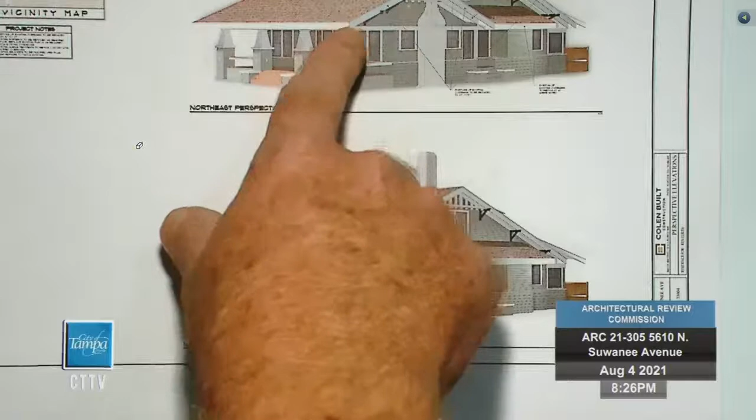There was actually some rotted wood on this. It has a tongue and groove 1x4 beadboard overhang soffit, which is actually the decking of the roof. There was rot on the bottom corners, especially in the rear. I don't have photos of it, unfortunately. They were rotted out back there, but that's part of what we cut off. Got rid of that, so it was advantageous for the owner also to not have to chase down more of that type of lumber.

The final thing I would like to point out is where the property line encroachment does occur on this elevation here - that helps there. To physically try to do this without a helicopter or something of some sort, it's almost impossible.

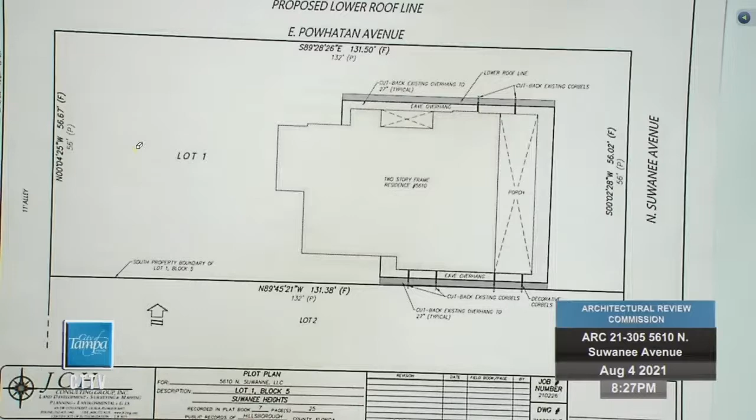We did actually rent a lift from the street that reached to 80 feet to be able to reach out and try to get this done, but you can't put 2 or 3 of them in there, and that's what would be needed to try to rebuild that all the way up to the full 4 feet, or any type of dual bar rafter, without being on the neighbor's property or disturbing his property whatsoever. You just physically can't do it - there's nothing there to walk on, there's nothing to support it at all.

That's about all I've got to say - those are our driving factors there.

My name is Kenneth Colen. I'm speaking on behalf of the owner of the property. My family has been in the neighborhood for many, many years. My grandparents purchased 5758 Suwanee in 1924 and lived there for in excess of 60 years. And my sister lives in the 5700 block. So we're no strangers to this neighborhood, and we respect it. These are beautiful homes, and we wouldn't alter anything without cause, without good reason.